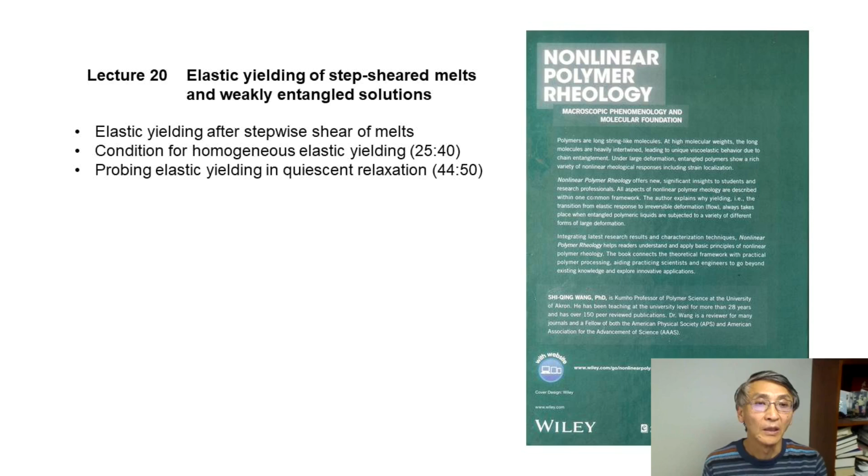Okay, in this lecture 20, I'm going to describe 3 topics. One is to share with you some further characteristics associated with the observed elastic breakup during step shear. Then I will move on to describe under what conditions we should expect step strain to give you quiescent relaxation. Homogeneous yielding will not produce any motion. Lastly, I will use the example of a weakly entangled system to show you that in absence of any observable motion during the stress relaxation, how do we learn about elastic yielding?

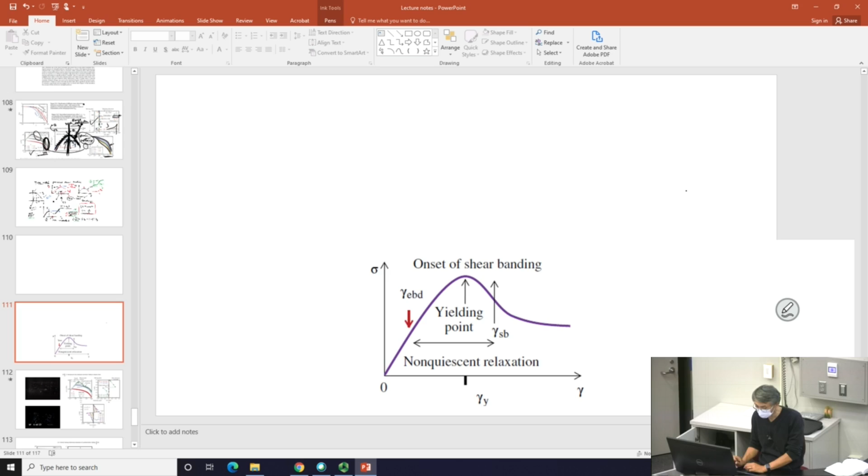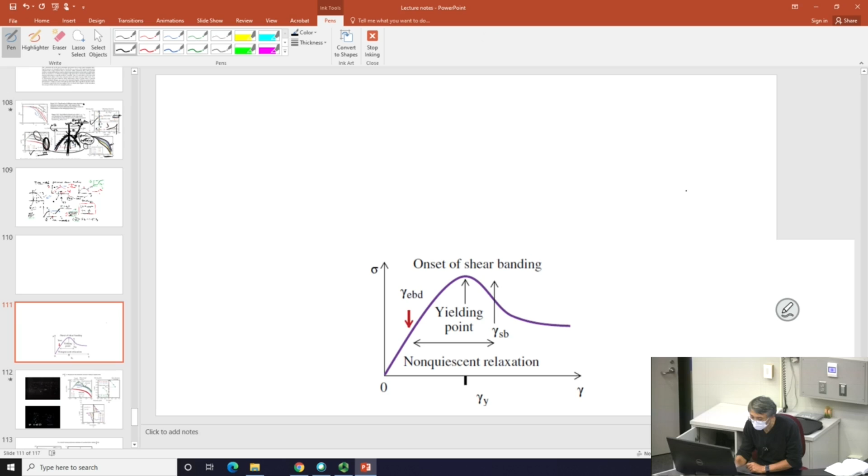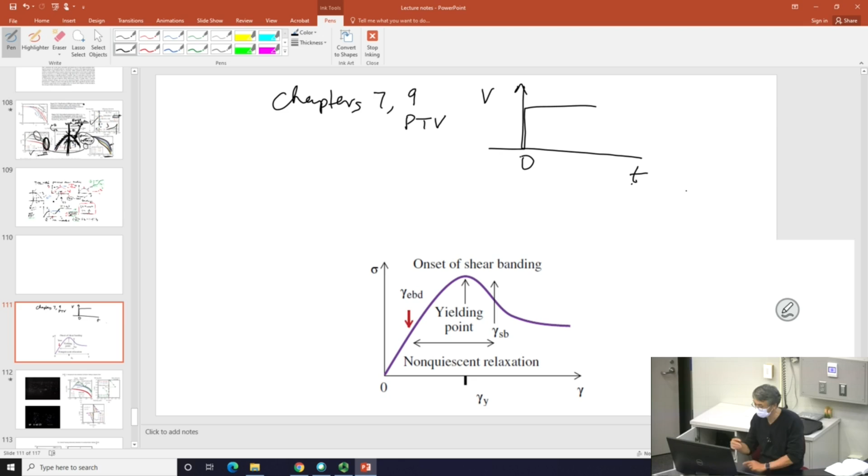So last time we started to talk about what happens after large step strain. Today I want to dive a little deeper into this topic, so I'm going to review for you particularly the relationship between the step strain and the startup shear. We talked about startup shear in chapter 7, and using PTV to observe what happens in startup shear in chapter 9. Those are all just startup: you have a velocity all of a sudden build up, and you watch what happens stress-wise as well as the strain field-wise.

So now we switch to part 3, which is all about step strain. In other words, we're going to terminate, instead of continuing forever, our startup shear. So this is what we have: we have this startup shear. If you monitor this whole startup process, the stress will build up, reach a maximum, and come down.

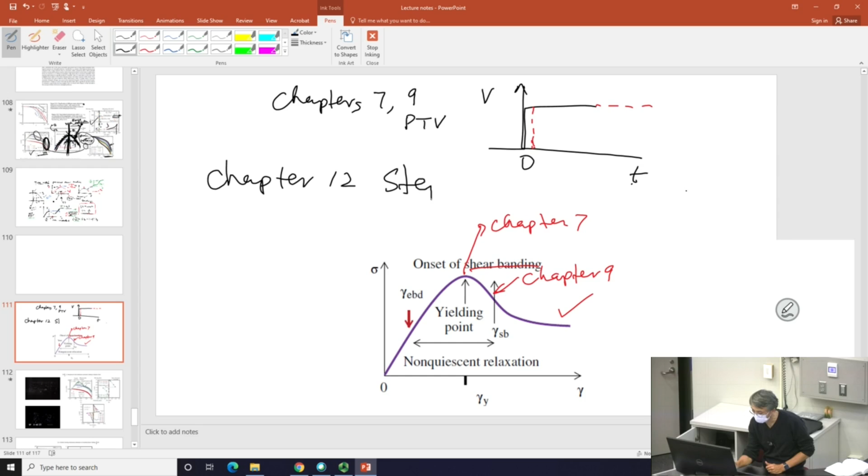We talk about the scaling in chapter 7, and whether there will be shear banding or not after the overshoot in chapter 9. It's interesting for you to appreciate the relationship between what we're doing in this chapter 12 on step shear, so-called, and startup, which is what we did here. The relationship is rather straightforward if you don't dogmatically try to follow the textbook.

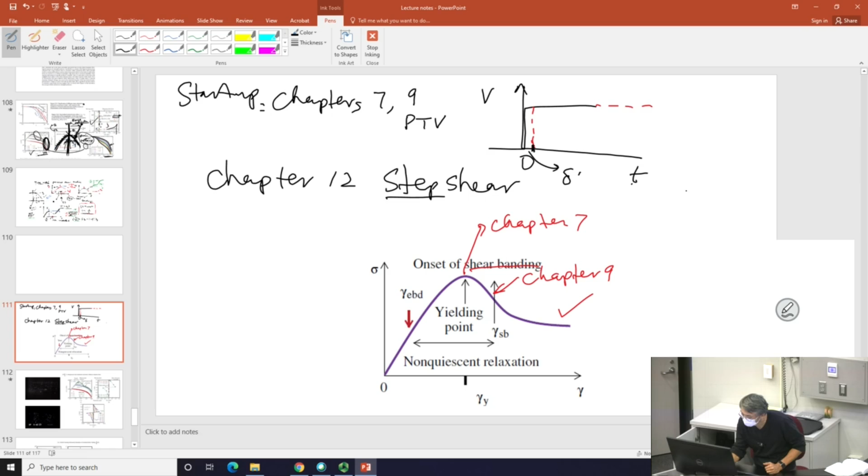Textbook says step shear needs to be so fast that it's never considered as part of a startup. But it's always a startup because it takes finite time to build strain. I hope you guys are comfortable with this. How much strain is building? It's building x over h, which is delta T times V divided by H. That's how much strain you're building, right, if I terminate here.

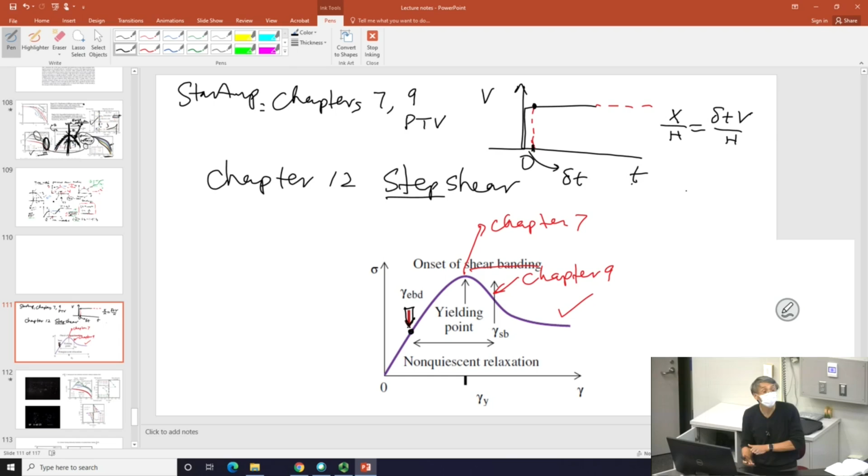Similarly, the response in stress is in purple, again, if we terminate here. That's what we have been doing: terminate here, in other words, way before reaching the yield point. So obviously your sample has been undergoing essentially elastic deformation, and then you terminate and watch and want to know what happened. I motivated this a lot about wanting to know what happened, because it's supposed to be rather uninteresting, at least from the point of view of observing anything during relaxation.

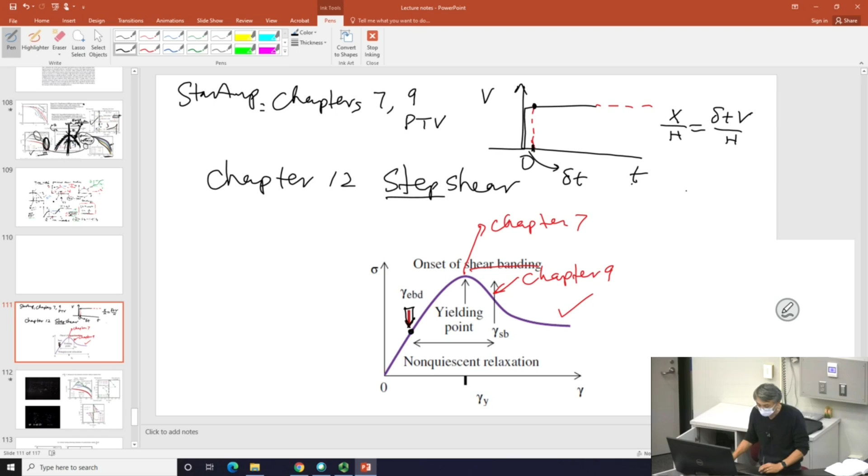It's supposed to be quiescent. So when I say we dig a little deeper, I mean several things. Let's start with some details. This movie, you have seen it before. This involves solution, and you can see the sample start to wake up before your shear cessation occurs.

This is for solutions, and I think you can really object to that, thinking somehow the solution is behaving rather funny because you only have 10% chain, there's so much loose space, so much space there, maybe something funny happened. So it is absolutely necessary to find out whether anything like this is true in melts.

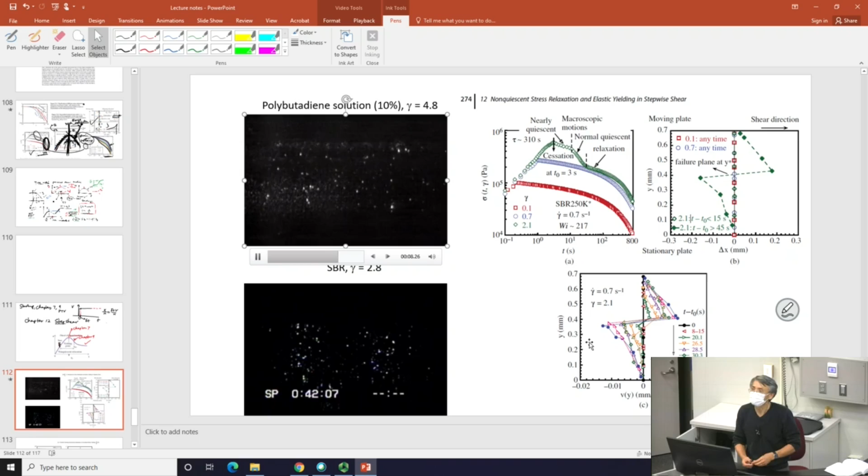Absolutely necessary, so we struggled to do this. Luckily, it turns out SBR with a high vinyl content is such that you can use supermarket super glue to glue your polymer to the steel plates. So basically, you're getting hold of a piece of SBR, of high molecular weight, that possesses a b/H that's rather large, much larger than 1.

So you will have plenty of wall slip if you don't superglue it, or do something to fix it. So this is pure. I cannot imagine not having the superglue. What do you do? It will be a massive amount of slip, and then you will not build enough deformation in the sample.

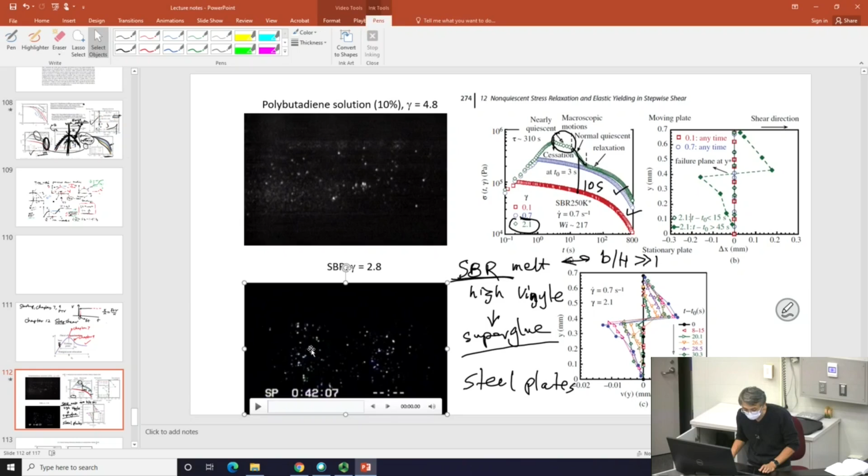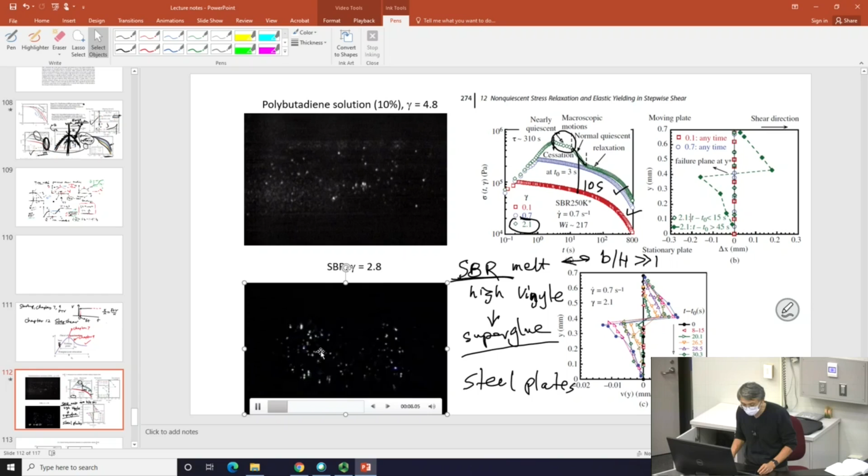And it turns out that's when the motion starts. In other words, it actually was largely motionless after shear cessation for the first 10 seconds. So these are just his analysis of what happens. You see, basically this thing remains stationary. So I have to put my cursor here and wait for 10 seconds, and you will see how much motion there is. And these two graphs, now you see 10 seconds is this long. Now you see how much motion? Tremendous. It just falls apart after 10 seconds.

So this analyzes at different times the speed with which it snaps back, because the middle broke. So whatever sheared wants to snap back. And the other figure just tracks the particles that you initially identify vertically, and finds at a later time where the particle moved to. So again, he's trying to show in the first 15 seconds, the particle didn't move anywhere. And after 45 seconds, these different particles along the gap moved away from the initial position. So it moved as much as, you see, that's about a fraction of the gap. That's a lot. Remember, the gap is 0.7 millimeters. It moved about 0.2 millimeters on each side.

Okay, right? So that's the phenomenology. So we confirm that melt also breaks apart. We're still far from figuring out why they break apart, and that's part of the theory yet to come.

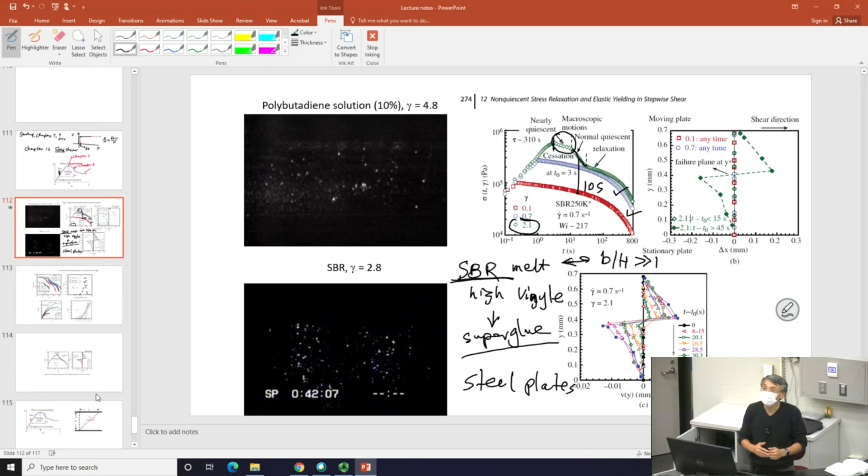So if you move on, remember the science is always what, how, and why. So we know what question to ask, and we are going to just accumulate, moving to the next step, about how. A little more of how.

For example, if you have three different molecular weights, how does this breakup occur? I know by now you can probably connect between what I mean by breakup, meaning motion starts to occur, to the kink - that's where the kink occurs. In other words, when the samples start to break up, the system is taking advantage of that, trying to quickly release the build-up stress that's there. So the occurrence of the kink corresponds to where the sample was about to break up. The onset of the kink is the onset of the breakup.

Since we are on this page and with Rouse number on here, I may just indicate one crucial thing. The occurrence of the kink, experimentally we call it TK. The literature has accumulated a lot of knowledge about what TK is. And it has bothered people for quite a bit that this TK can be longer than Rouse time. Why does it bother you? Because the tube model had the feature that this kink can only occur around tau r, not later. It bothered people. People try to modify, try to see a few different things, how they can change the tube model. So in that sense, the tube model is not crisis-free.

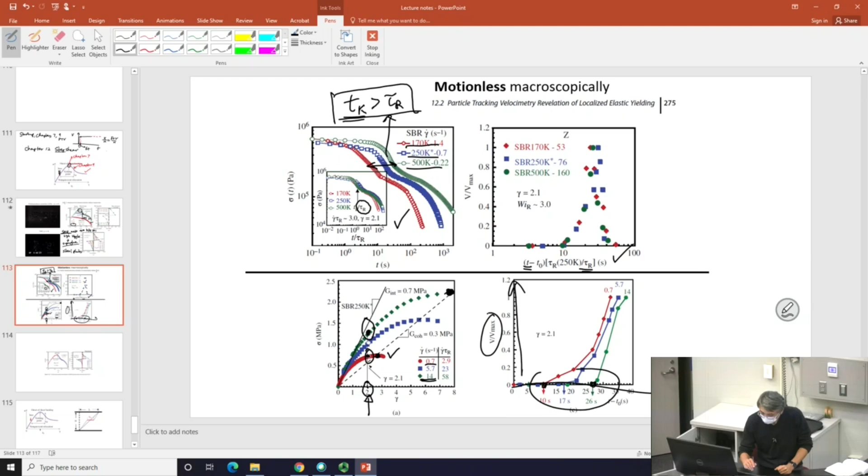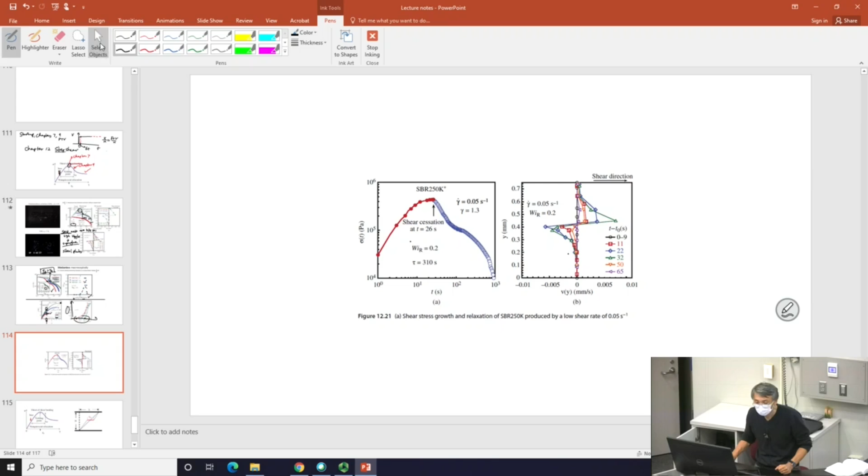So the point I want to focus on when we dive a little deeper is this one. Let me blow this up a little more. This is a case where we are aware, by this time, what the tube model says, where we know this non-quiescent motion means the sample breaks apart.

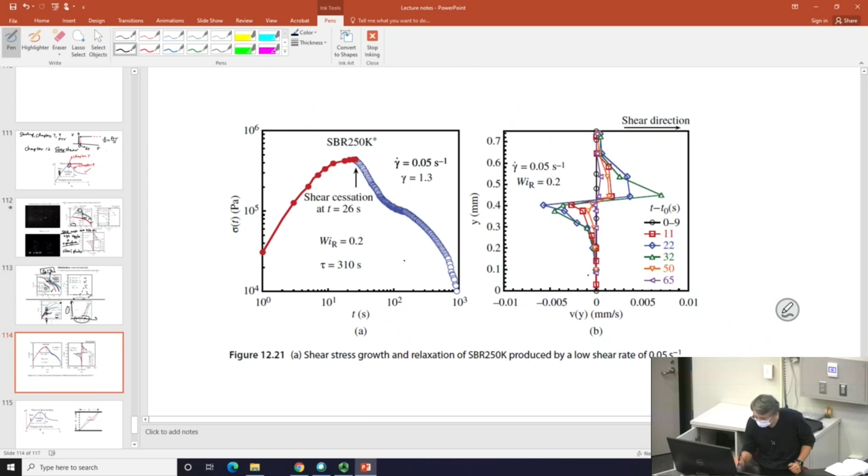And we are further aware, by this time we are definitely aware - in fact this paper, by the time it was published, was already 2009, for the melt. This is for the SBR melt. When we first did the PB solution...

...that's the spring of 2006. It was absolutely perplexing to explain why there is non-quiescent motion, the 'why' part. So it just gives you the timeline, which I'll say a little more about. By the time of summer 2006, we already knew the physics - meaning we already understood the physics driving the sample to break apart.

So of course by this time we know what we're looking at - we're looking at the failure, for example of a melt. We're looking at TK, as I showed you, that's a kink showing the sample is breaking up.

But notice this in Puyang's paper - he was patient enough to apply a rate such that the so-called Rouse-Weissenberg number would be smaller than 0.2. What does this mean? I'm gently introducing two models to you, step by step.

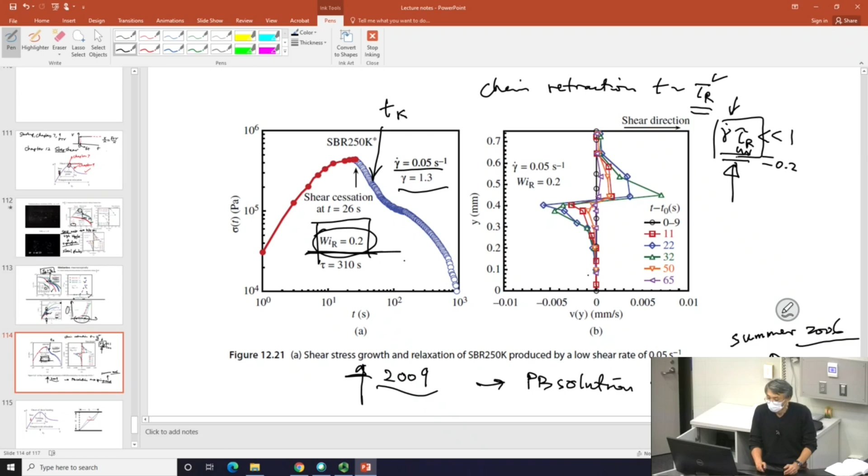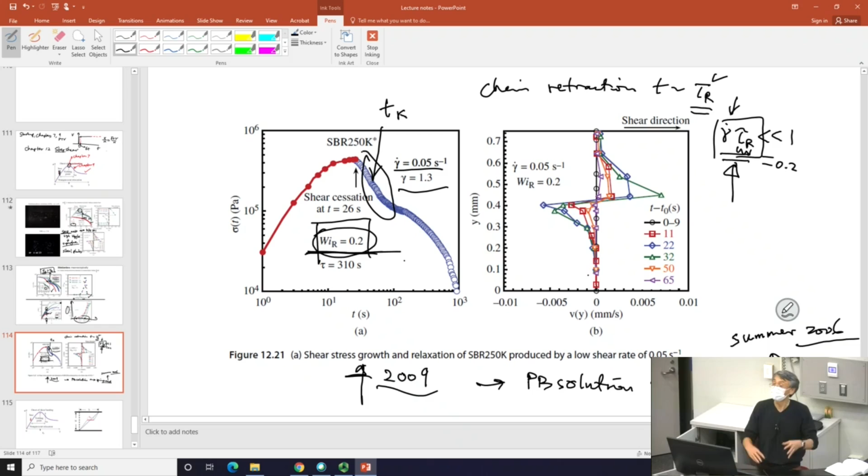If you try to quantitatively compare with the tube model, which we didn't, there won't be such a gigantic kink, because that drop is due to the massive amount of chain stretching. If there is no massive amount of stretching, this kink will be very negligible. But we see a kink because it still breaks. So at least we were trying to probe the limit where the breaking can occur without requiring the system to be highly stretched.

This is just the details of how this weak shear produces the observable macroscopic motion at different times. Initially, of course, not—again, it has an induction time of about 10 seconds or so.

I don't think this is the final word, although such experiments are usually not so easy to carry out, so I have no idea how soon it will be reproduced in the literature. But we did express our interpretation about what this means—that again, this is not something the tube model can anticipate. This is basically what we're saying.

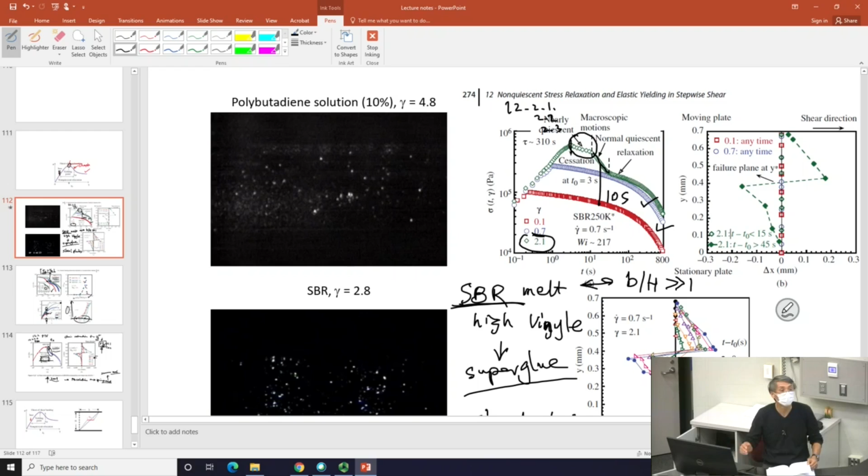It means there were several features that I went through, so here there will be 12.21, 12.22, 12.23. It's all in the book—that's why I can afford to be somewhat less formal.

In any case, the next one I'm eager to describe to you is described in section 12.3. This is, in my opinion, even more important—it's toward the issue of why. So it's not just what happens and how it happens, but why it happens or why it doesn't happen. So this one is talking about...

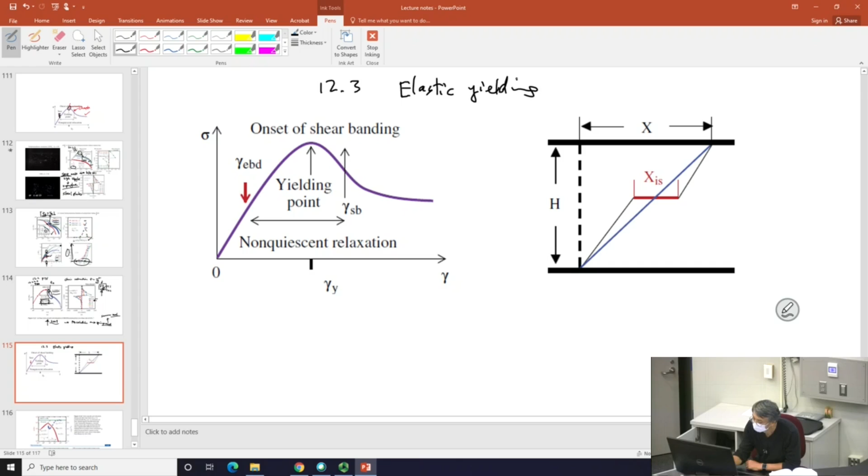I mentioned this concept last time, but I will say more about it. This is talking about elastic yielding that occurs homogeneously. So allow me to repeat what elastic yielding means. We, from the movie, saw that after step strain, things break apart internally, and that breaking apart is suggestive of structural failure.

There's nothing more suitable than calling that failure yielding. It was elastically strained, and upon cessation, that elastically strained structure is incapable of maintaining that elastic state and breaks apart. So that breaking apart is yield, and we know the driving force for that yield is this elastic state—in other words, being strained sufficiently enough. That's why we call this elastic—I mentioned that, I omitted the word. You can call it elastically driven yield or something. So basically, it's elastic yield.

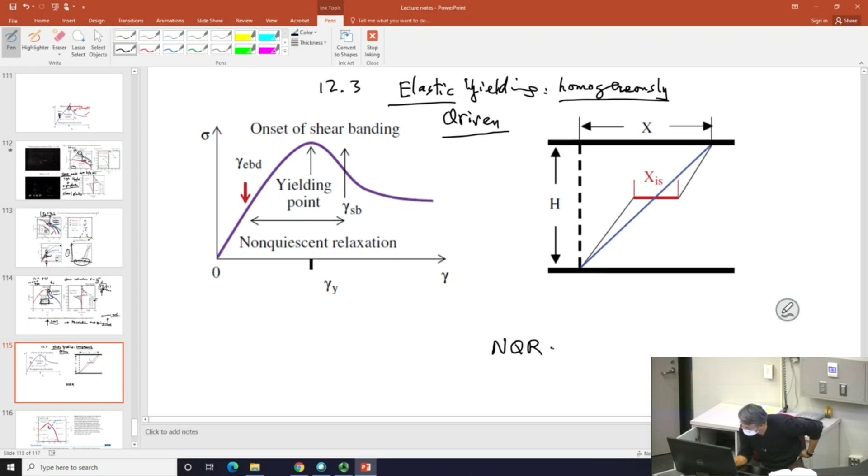And we had a movie showing that the sample falls apart. It means when you have non-quiescent relaxation, this elastic yielding took place in a localized manner. This means elastic yielding occurred not uniformly everywhere across a macroscopic sample—localized.

So here on this page, I would like to discuss the condition where localized elastic yielding occurs, or how you would avoid localized elastic yielding, which means elastic yielding homogeneously. So under what condition would my movie be boring? There will be no motion. In fact, if you were giving me a movie showing no motion, I would be clueless—clueless about what that kink means.

In theory, you may still have a detectable kink, perhaps, but it will not have motion to give you insight about what happens. So I want to indicate the reverse: even if the relaxation is quiescent, it does not mean elastic yielding did not occur.

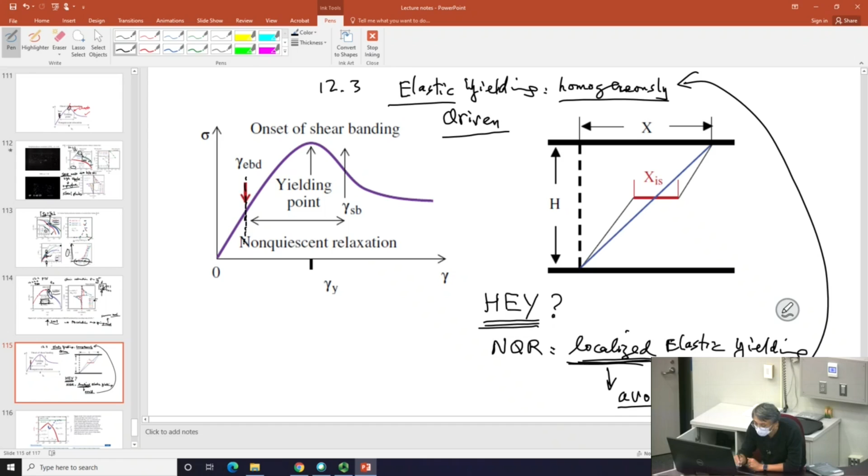So this figure further says, hypothetically, or practically as well, that there will be a threshold amplitude. Only beyond this point will I see non-quiescent relaxation. So only beyond that point, which means for amplitude smaller than this gamma, E stands for elastic, BD stands for breakdown.

So if I use a smaller strain, it will not have produced non-monotonicity. It will not have produced the kink and the non-quiescent relaxation. This was related to what I asked last time about when, after step strain, you see motion. When does the motion cease?

And the idea was that if you have your sample here, your sample all of a sudden starts to break.

You start to break, which means it will try to snap back like that, right? And I was asking last time how much it has to snap back before it heals. So suppose it heals by the time it snaps back to here.

So we're not clueless as to when they start to heal, because we know the threshold beyond which the sample can suffer failure. So by the time it returns enough, it should start to heal. So that's what I'm proposing for you—it will heal.

Now let's go to the story of the condition when the deformation, when the relaxation will be quiescent. I don't think it's too hard for me to suggest, based on our experience with wall slip, that the failure is a result of internal slip.

In other words, internal disentanglement—some type of disentanglement that occurred internally. When I say internally, I mean this picture. I should always copy this image here.

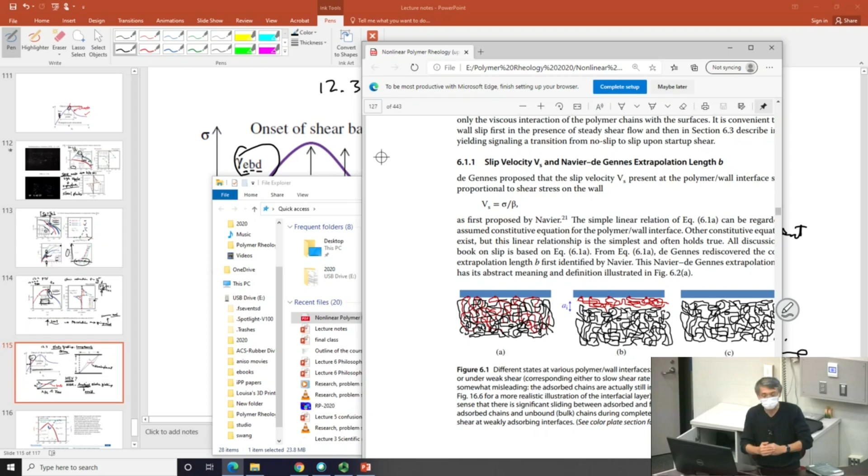In other words, this is the example at the surface, but remember I had super glue, so somehow I was able to destroy the premature failure from the surface. Now it could only occur in the bulk.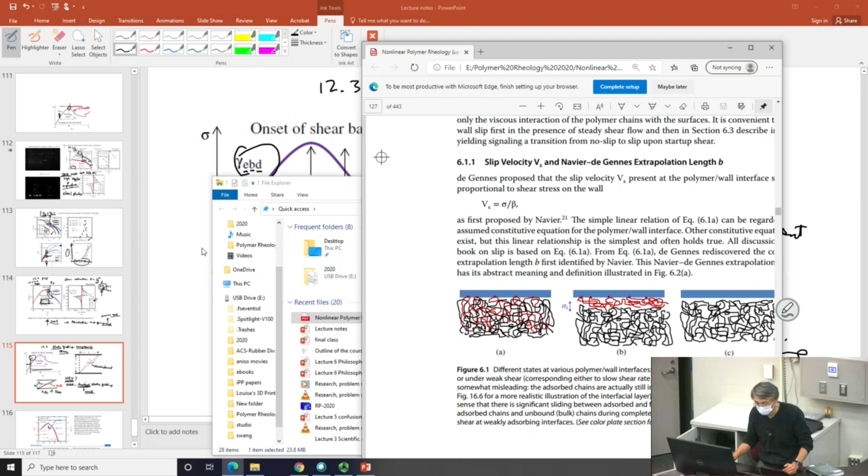And in the bulk, let's pretend that it's also possible for one layer, which is red, to start disengaging with the other layers, as depicted in B, so-called. So let's say you have one layer that's disentangling like that. Let's just examine the consequence of that.

Well, we are familiar with the idea that when a layer of disentanglement occurs, it produces a slip velocity, Vs. Let's call it internal slip, Is, to be consistent with my book. And if they slip with a slip velocity Is, it could produce this crack

over a time. Let's say this disentanglement could last a time of TIS. Then this crack will have a size of XIS, as written here.

So this crack is a sizable crack if, and only if, this ratio is not much smaller than 1. In other words, if this crack is negligible compared to the displacement imposed on the sample, let's say the crack is only within the thickness of that blue line, then the system doesn't notice that one layer has disentangled.

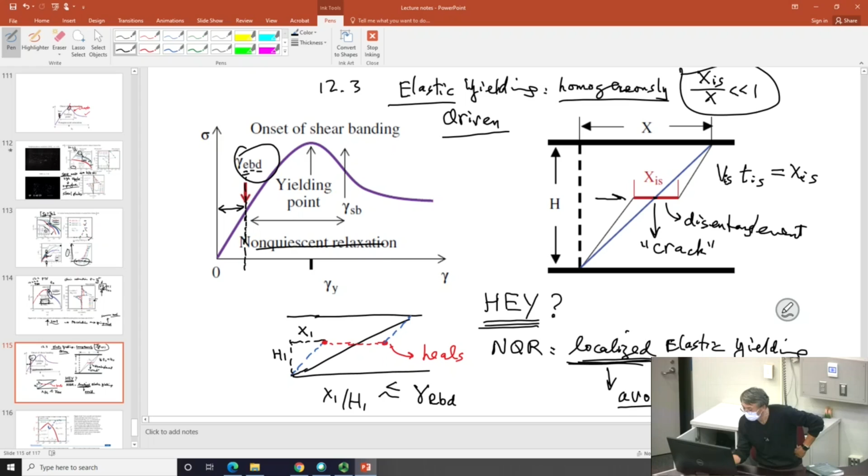So only God knows why you could have this localized elastic yielding. When I say God knows, it's some kind of horse race. One layer starts to fail first, and they communicate. It says, oh, I'm failing, so you guys can take advantage of me, and other layers do not fail. Then that's what I have here.

So we are considering the condition of this ratio. And this ratio is very easy to do, because all I need to do is that, and then I haven't done anything yet. I'm trying to save some space. Of course, this side you have to divide by x too. So basically, I'm trying to evaluate this ratio, and this ratio is nothing but, you see the bottom is what? It's gamma, so I'm just multiplying something.

And at the top, I'm going to further evaluate what slip means. Slip, according to what we learned from wall slip, is stress divided by beta, giving slip velocity. Remember, by now I think you guys still remember it. And then you can write down something further. This stress is G times gamma, it's Hooke's law, because that's the step strain you did.

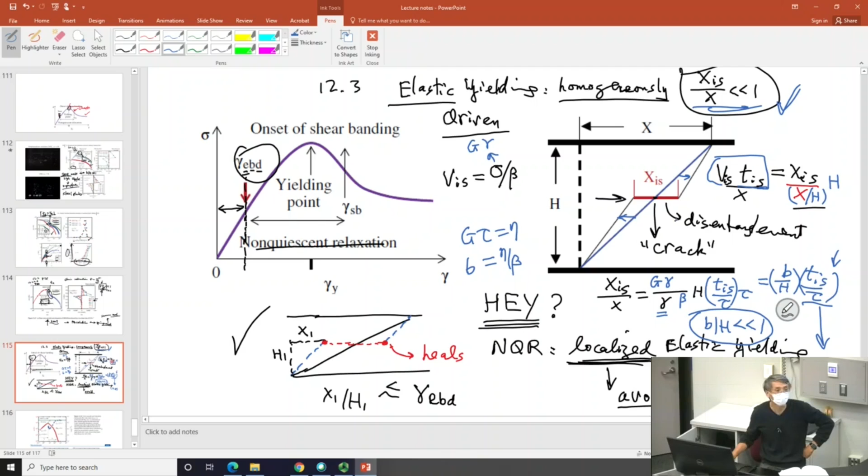With that, we can go to one of the last questions: if you are in this limit where b is smaller than h, you have no movies to learn about the so-called elastic yielding, which is a shear cessation-induced structural failure. Shear cessation means that when you stop, structural failure can take place. But if there's no movie, how can you speak about it? That's the next paper that Yang did, so I'm going to go slowly through that with you.

So suppose you have a condition where there was one stone, two birds in this study. He picked a sample where B over H will be small, so don't count on seeing motion. Bad luck, you won't see it.

Secondly, for the second bird, he also considered a condition where the tube model will not anticipate any structural failure, because the chain was only deformed 10%, according to this parameter, the Rouse-Weissenberg number, being 0.1 here.

So one stone, two birds. We are trying to figure out, upon shear cessation, with such a slow shear where the chain deformed very little, can the structure actually undergo failure induced by shear cessation, without the aid of a particle tracking velocimetry measurement, because there will be no motion. So that was the aim.

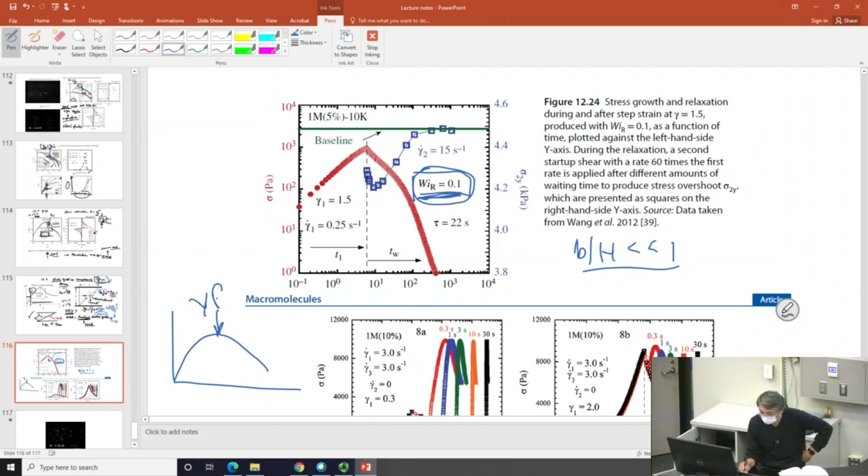Since we have a pretty strong belief that the stress overshoot we've spoken about so many times is an interesting point -- a point speaking about structural failure, a yield point -- can we use this feature to learn something about the structure?

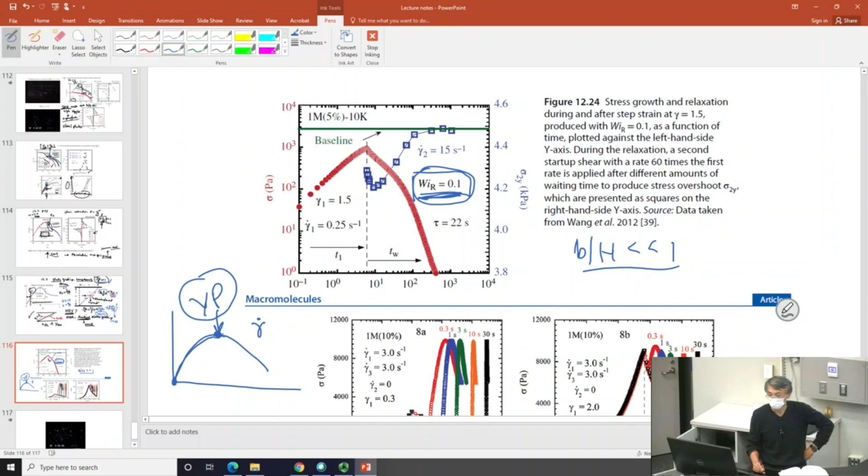In the following sense: if my sample is intact as a fresh sample for a given shear rate, I will always reproducibly reach this maximum. I reload the sample, and it will be the same rate every time. So if that's the case, you can already learn something very interesting.

Suppose I only shear my sample 10%... well actually it was 30%. 30% turns out to be quite mild -- it's not going to destroy the entanglement network. So that's one-third of H to the right, very gentle. Therefore, when your shear cessation occurs, the structure is always intact all the way along.

How do you know that? We, of course, don't have a movie to show because the sample will not break up for 30% deformation. So he did it by imposing, during different times of relaxation, a very fast startup shear to watch what the overshoot peak would be. And he found it's all the same.

Of course it's the same, because the structure is the same as before you started your experiment. So this is confirming that this could be an indication of the structure.

And then he started to shear 200%, and then stop -- this is all a discrete experiment. He stopped, and after a few seconds he applied the next shear rate and got this peak. He redid this experiment; next time he stopped and waited longer, and got another peak overshoot. And you saw a valley.